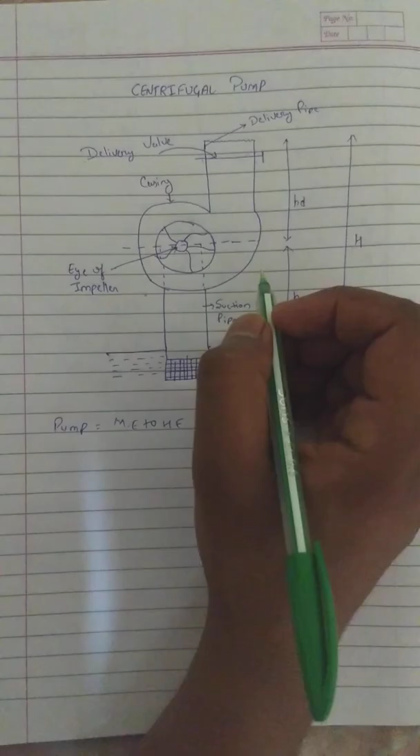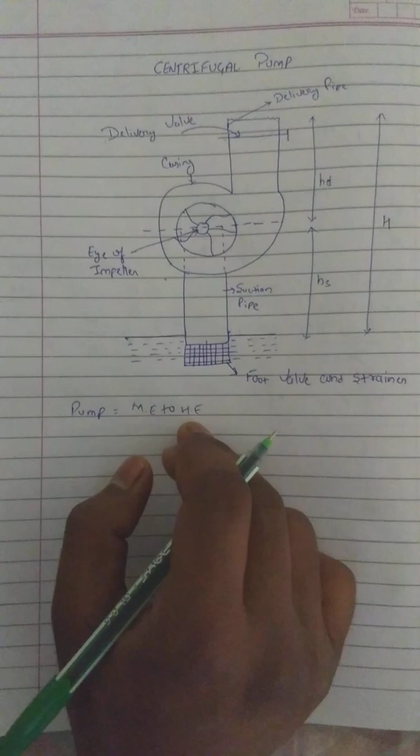In this video, I am going to discuss centrifugal pump. Before going to centrifugal pump, we discuss about pump. A pump is a hydraulic machine which converts mechanical energy to hydraulic energy. This hydraulic energy is in the form of pressure energy. In centrifugal pump, this conversion is by means of centrifugal force, and the pump is called as centrifugal pump.

Here you can see the construction of centrifugal pump. The main parts of centrifugal pump are casing, impeller, suction pipe, delivery pipe, and here we have the foot valve and strainer, and here we have the delivery valve, and this is the eye of the impeller.

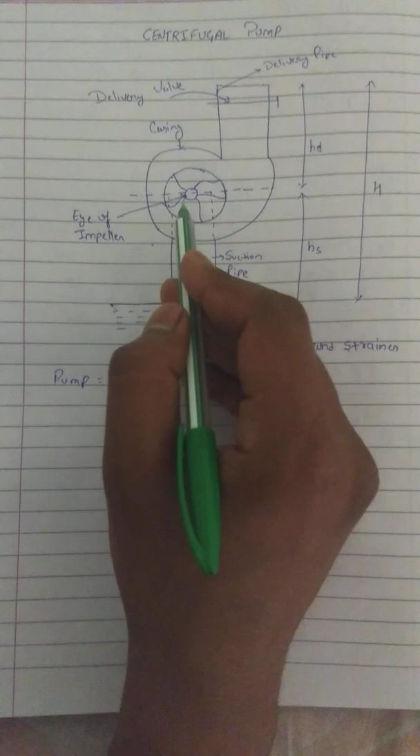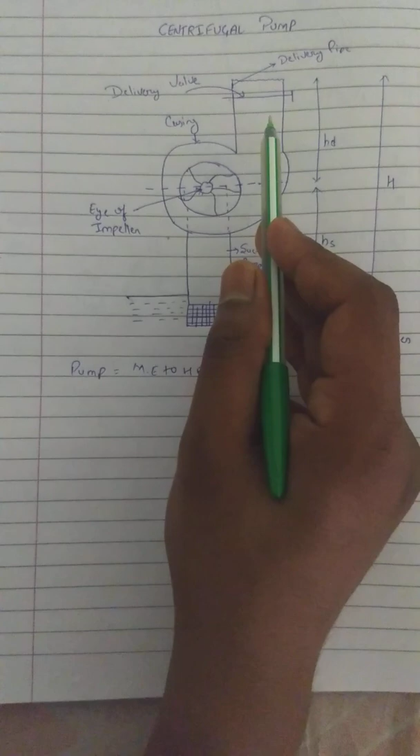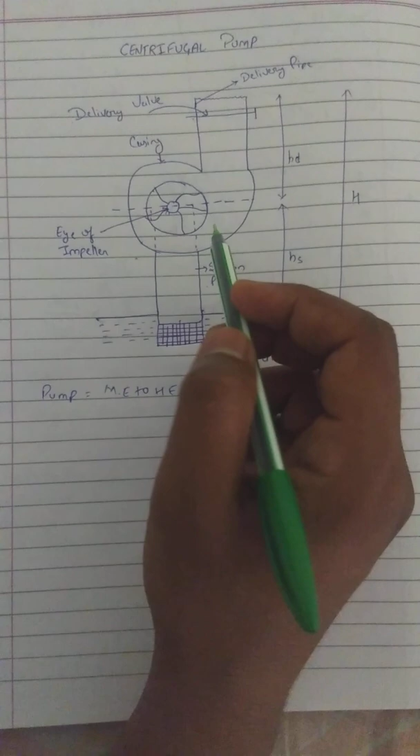Before moving to the working, we will discuss the principle of centrifugal pump. The rise in pressure that we get here is from the pipe, and with the help of this impeller the water will be rotated and it will get velocity, and that velocity is known as tangential velocity. So finally we got out here the pressure head. The pressure head we get is directly proportional to the tangential velocity that we get here in the casing.

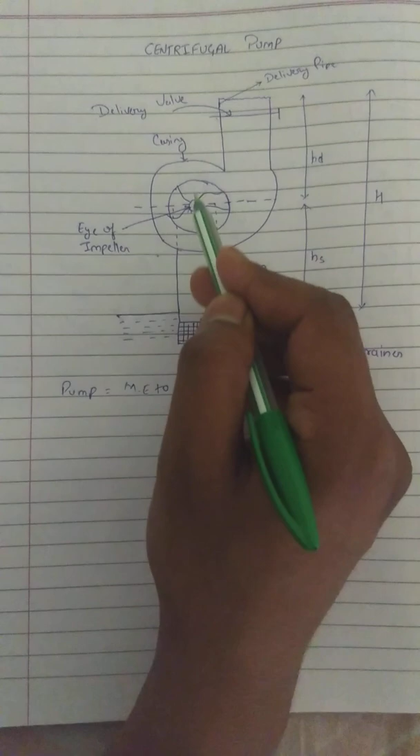Principle says that the rise of pressure head is directly proportional to the tangential velocity. The moving water here in the casing will have the tangential velocity as it is moving, so the outlet pressure head is directly proportional to the tangential velocity in the casing. So this is the principle of centrifugal pump.

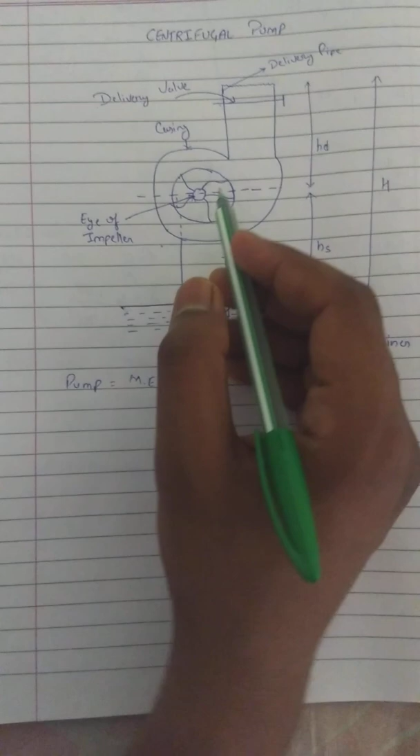Now let us move to the working of centrifugal pump. The eye of the impeller is connected to the shaft. With the help of the eye, the impeller is rotated. When this rotates, the eye creates a low pressure zone. Due to this low pressure zone, the water from the sump moves toward the casing, and this casing is filled with water.

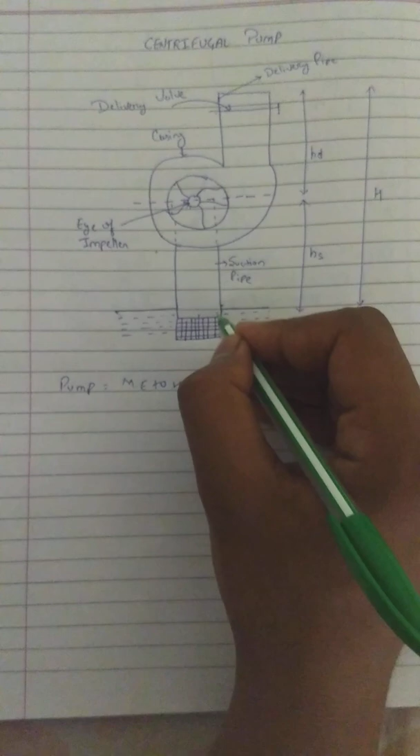Now the foot valve works as an upward direction valve. This is a one direction valve. It does not allow water to come back, and the strainer will remove unwanted particles before they enter into the casing.

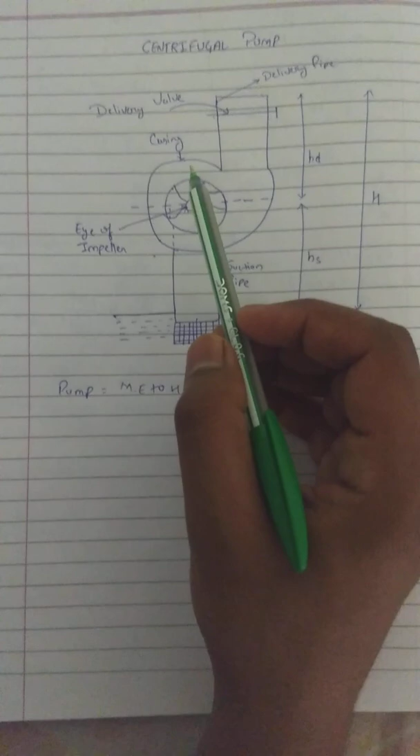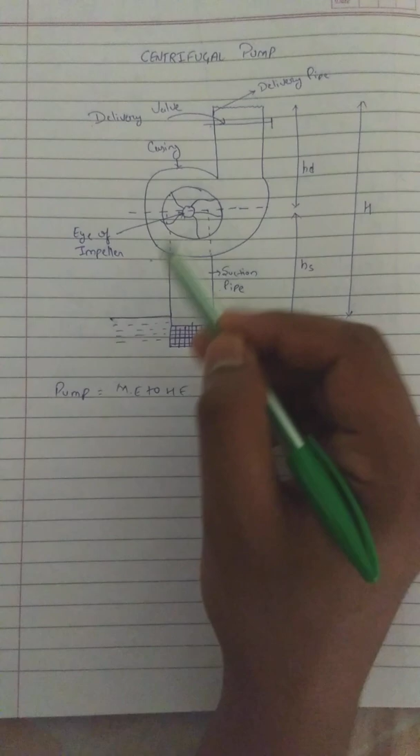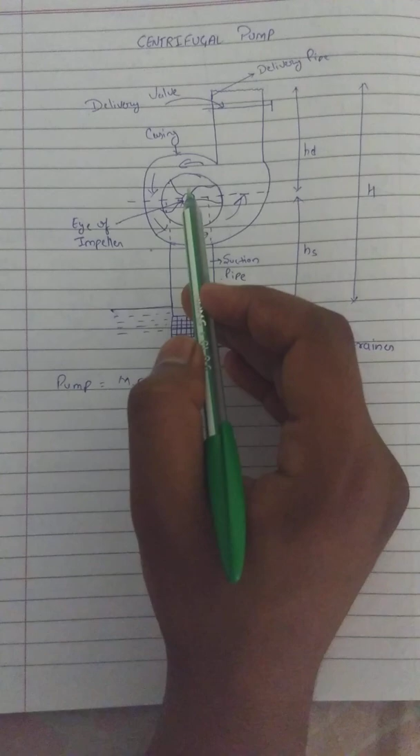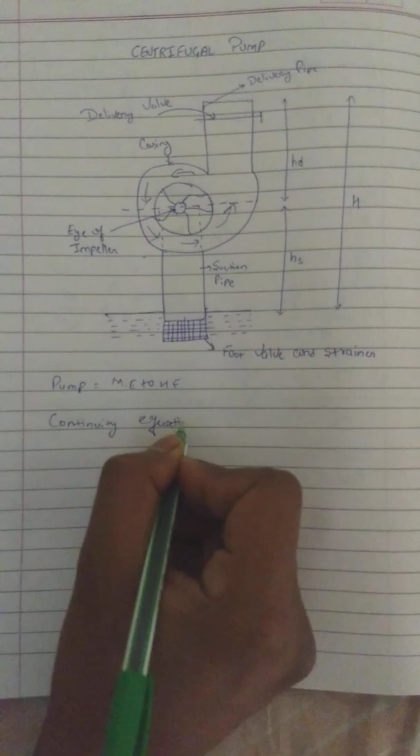And this rotated kinetic energy is converted into pressure energy. Now, we have studied about the continuity equation, that is, area into velocity is equals to constant.

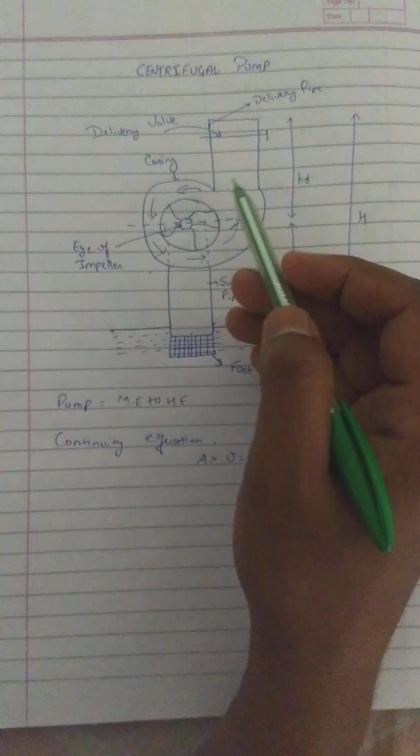In this, as area decreases velocity increases, or as area increases velocity decreases. So here in the casing we see that here the area is less and gradually the area is increasing. So as the area increases, velocity decreases by the continuity equation.

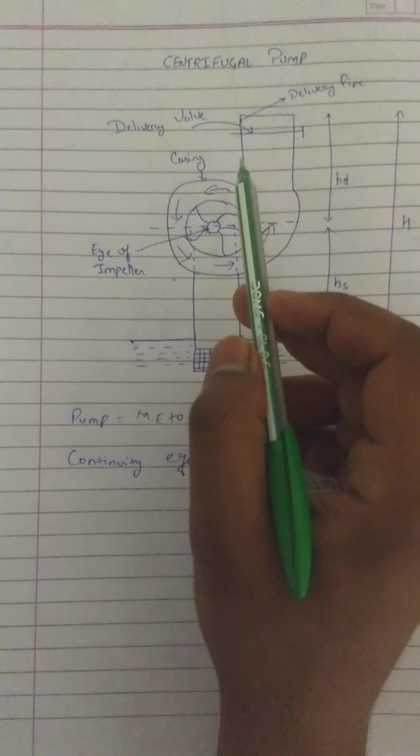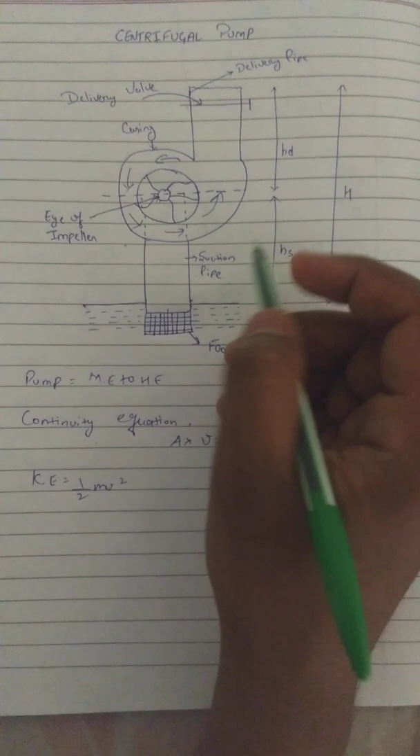As the velocity decreases, that velocity is the tangential velocity. As the velocity decreases, kinetic energy decreases, since kinetic energy is equals to half of mv square. As the velocity decreases, the kinetic energy from this point to this point decreases as the area increases.

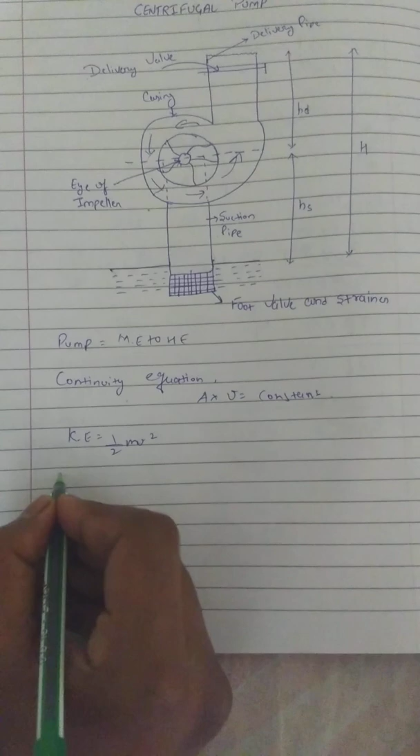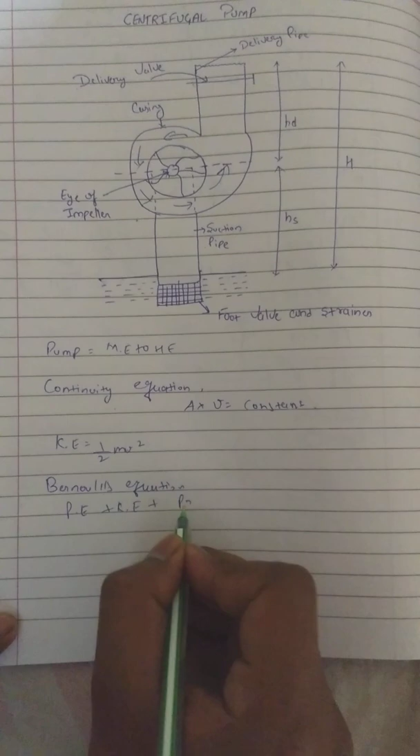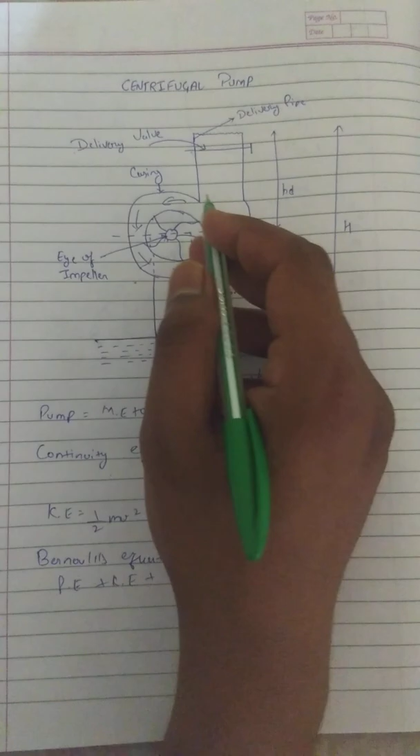Now let us understand how decreasing kinetic energy affects the pressure head. For that we will see Bernoulli's equation, that is, potential energy plus kinetic energy plus pressure energy is equals to constant. As we consider the casing at the same point, the points we are considering from the same level from the ground, we can ignore the potential energy. So at the end we get pressure energy plus kinetic energy is equals to constant.

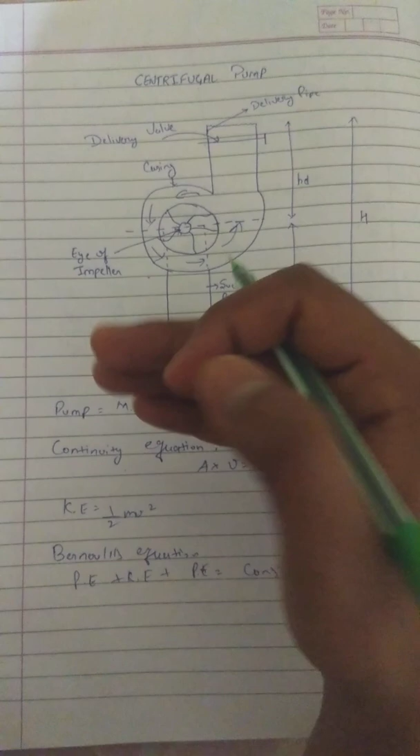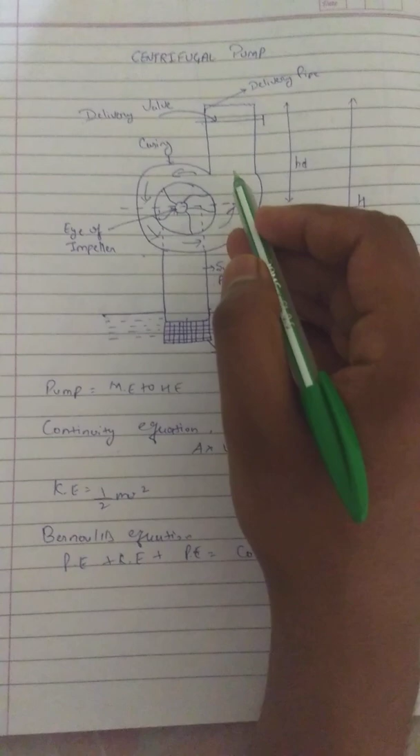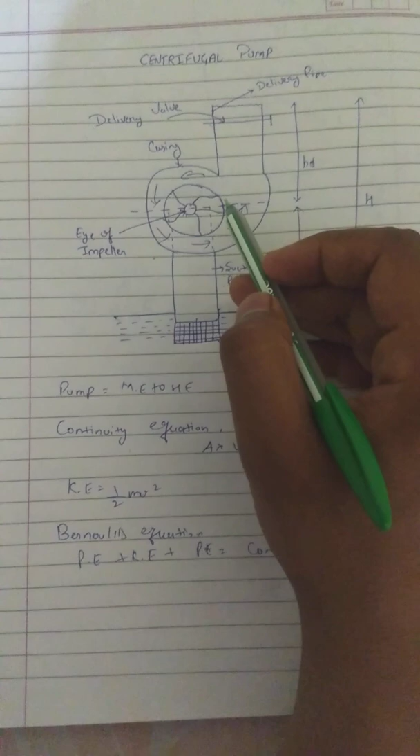Pressure energy increases as kinetic energy decreases, or vice versa. So here what is happening is that the velocity is decreasing, so kinetic energy is also decreasing. So when kinetic energy decreases, the pressure energy increases. So here at the delivery pipe, the kinetic energy is very less and the pressure energy is very high, which ultimately increases the pressure head of water, with the help of which we can take water from one point to another point for our respective uses.

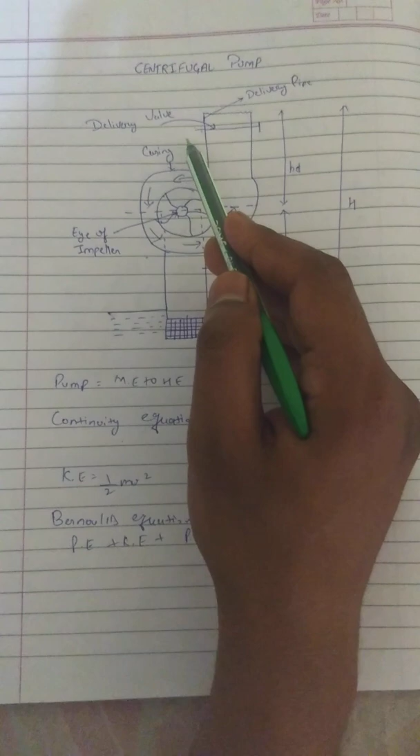Here we have the connected delivery valve. This valve protects the water from backflow. This is the working of the delivery valve. So this is the construction, working and principle of centrifugal pump.